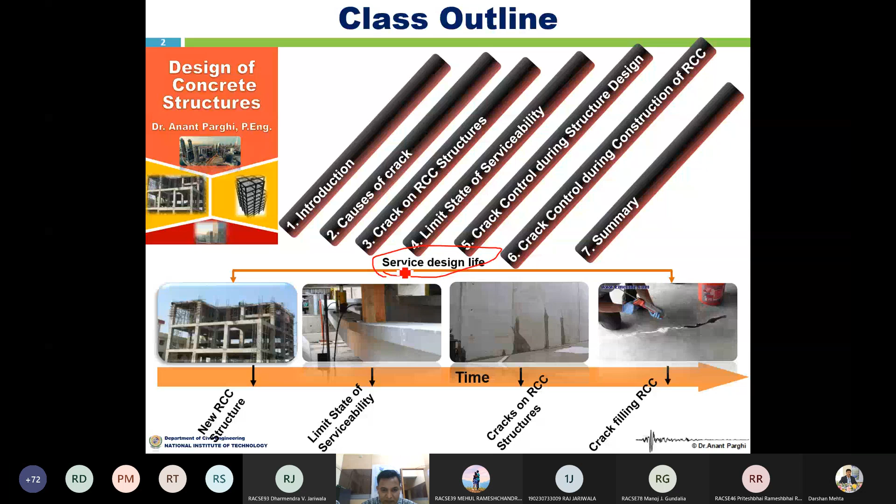For example, we can use epoxy or some rich mortar to fix the structure. Eventually we need to see what will be the service life of the structure. The main thing is the service life of the structure, how we can predict it, and that is related to the serviceability criteria.

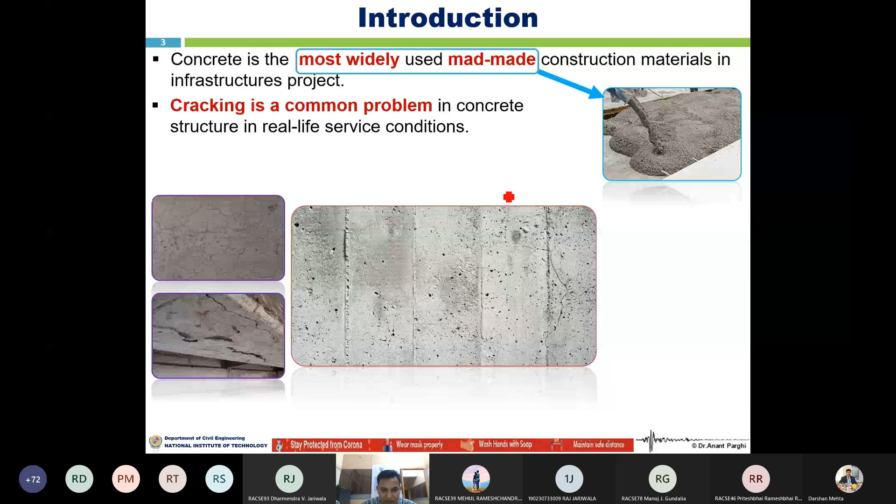Let's discuss what is cracking. Concrete is the most widely used man-made construction material in infrastructure projects. Cracking is a common problem in concrete structures in real life service conditions. In this photograph you can see how the cracks develop. Crack-free concrete structures are very rare to find in real world practice.

Let's say in construction practice, these are fresh concrete, these are hardened concrete. Here some structures show cracks - you can see all the cracks developing, randomly organized. Here also, in the existing structures and hardened structures, you can see all the cracks.

So how can we say this crack is affecting the safety of that particular structure? It will reduce the service life of that particular structure. The main thing is there are huge economical losses of infrastructure here.

Concrete can undergo early age cracking depending on the mix composition. Another factor is environmental exposure condition - severe environmental exposure, normal exposure, aggressive environmental conditions. Sometimes temperature effects also, like heat of hydration and curing condition. The main thing is curing - if you are not able to apply proper curing in the reinforced concrete structure, the structure is not going to become durable.

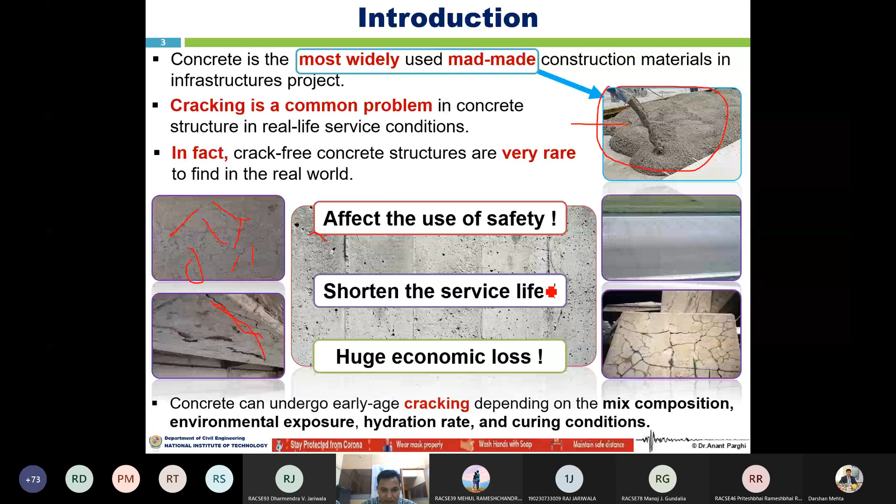Even if you are not maintaining the proper water cement ratio, you will find some shrinkage cracks. So there are different kinds of shrinkage cracks, and if the concrete gets hardened, you will see some plastic cracks.

Let's discuss what kind of cracks occur before the hardening and after the hardening. Once concrete is setting, we can say after hardening and before hardening, during the initial setting time. Before hardening we can have construction movement, plastic crack, frost damage. After hardening we can have volume instability, structural design issues, and physical or chemical causes.

So construction movement includes formwork movement - if your formwork is not proper, there are chances of cracks. Sometimes the subgrade also, for example in construction like rigid pavement - there can be cracks on the subgrade. If there is movement on the ground, there are chances of cracks in the subgrade.

We can say plastic cracks include plastic shrinkage, plastic settlement, and autogenous settlement. Let's discuss premature freezing, scaling, crazing - these are some of the types of cracks. Also volume instability, drying shrinkage - once the concrete is drying, if proper curing is not applied, there is a problem.

Thermal changes, creep also - that is related to long-term duration, like sustained load. Then hardening - after the hardening, like during structural design, once you are calculating the load, intended lifespan, design subgrade, fatigue load, alkali silica reaction, alkali aggregate reaction, steel corrosion, freeze thaw cycling. These are the causes of cracks developing in reinforced concrete structures.

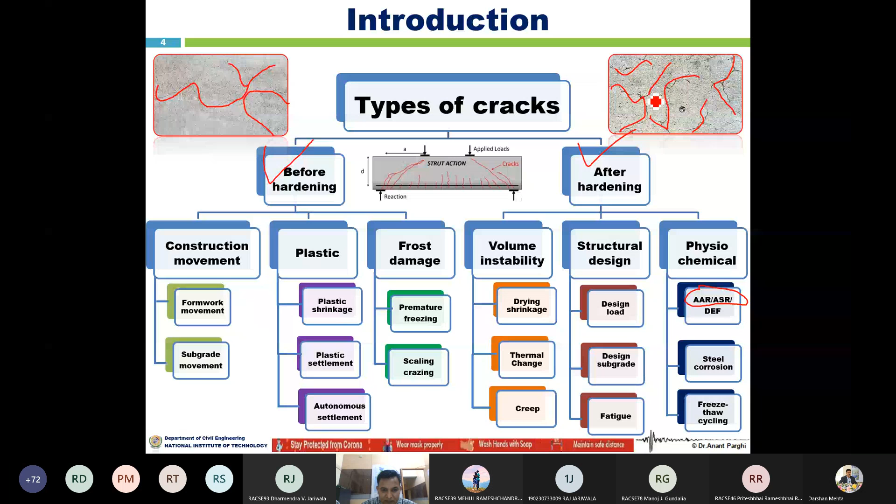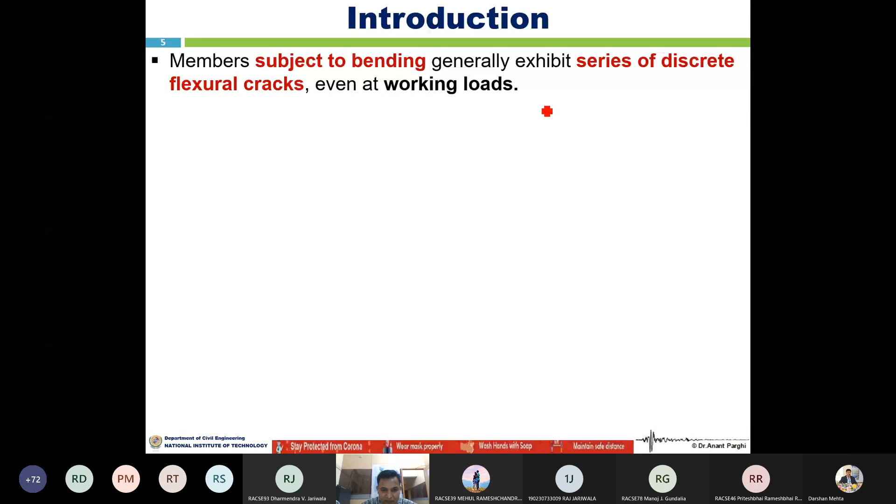So how do cracks happen? Whenever the structural member is subjected to bending, there is generally a series of discrete flexural cracks, even at working load.

Let's consider an example: an RCC beam, where depth of the beam is D and breadth of the beam is B. Let's say we apply a sustained loading. This is the tensile reinforcement here, and you are applying the loading - axial, like the gravity load. Because of that particular working load, there is a chance of cracking.

Here you can see the tension as well as compression zone. The compression fiber gets compressed, and the tensile fiber develops tensile forces, and because of that force, some cracks develop. So when tensile stresses are greater than the tensile capacity of that particular concrete structure, then tensile stresses build up, and crack is going to develop.

These cracks are unobtrusive and harmless unless the width becomes excessive. Some cracks are permissible according to the code of practice, but if it goes beyond that permissible limit, it becomes a harmful crack. So initial cracks develop because of the sustained loading.

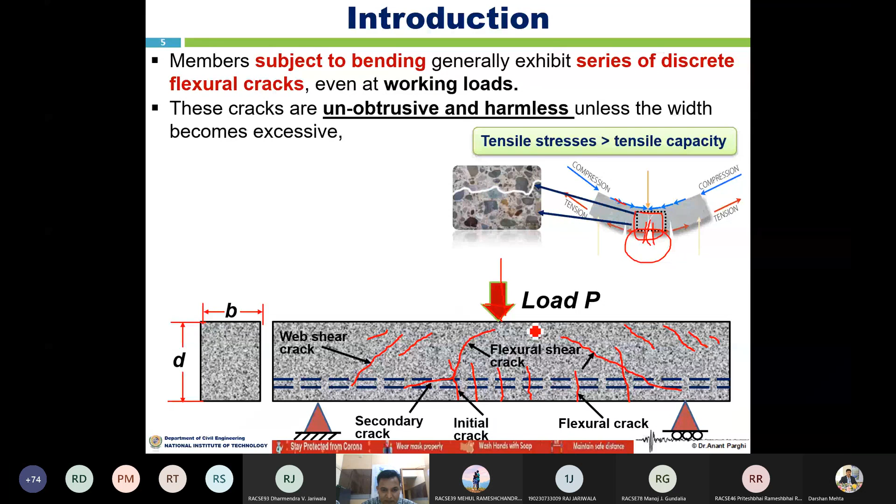Here we can say secondary crack develops in the concrete structure, something like here - you can see how the crack is, like a web shear crack. Because of this sustained loading, flexural cracks develop, shear cracks develop, affecting appearance and durability.

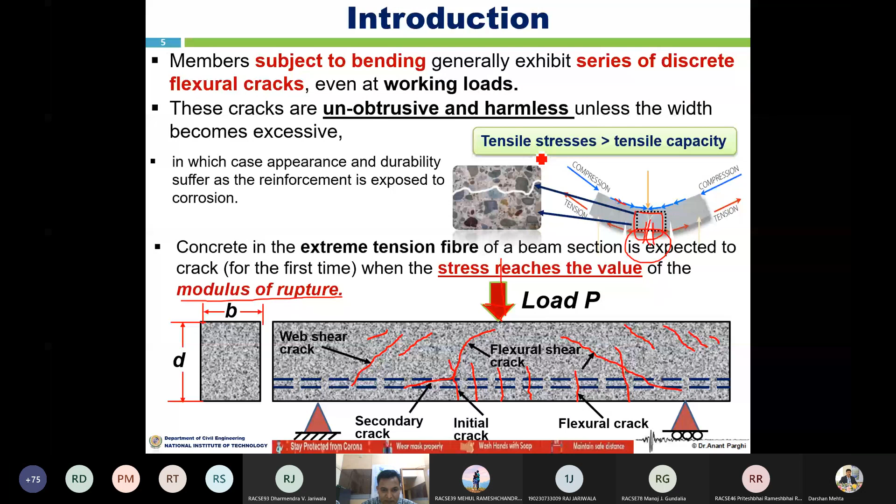The concrete in the extreme tension fiber of a beam section is expected to crack for the first time when the stress reaches the value related to the modulus of rupture. So once tensile stress is greater than the tensile capacity of the structure, then the crack develops - it will be a shear crack as well as a flexural crack.

Let's consider this RCC frame structure, where cracks are going to develop - let's expand this particular beam. Here you can see there is a flexural crack, and a web shear crack also. Cracking of the concrete section cannot be prevented, but the size and location of the cracks can be controlled.

So how can we control it? By using proper reinforcement, placement of control joints, and better curing practices - this way we control the crack. So once this crack develops, whether it is a flexural crack or a shear crack, we can control the cracks, their size and location, by providing proper reinforcement detailing.

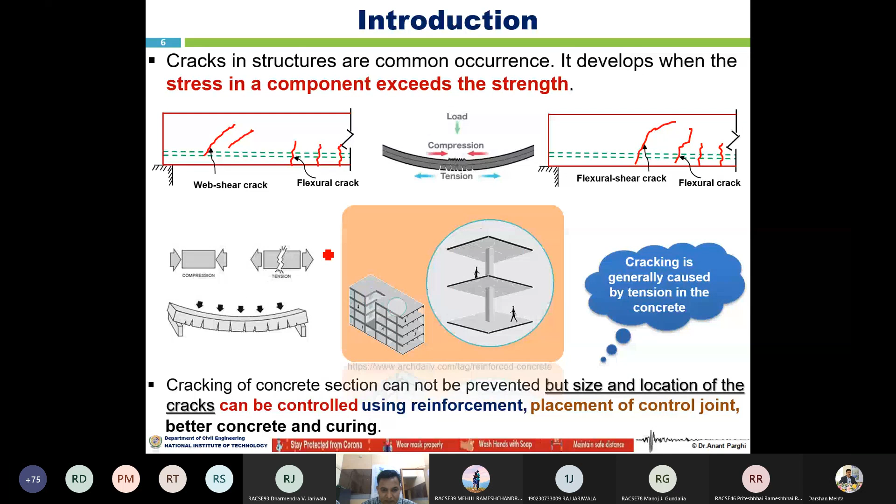Once we are providing the joints, also it should be proper joints and better curing practice, like construction practices as well as curing practices.

So causes of the cracks. Why do cracks develop? Load induced cracks will be about 5 to 10%, which we can consider structural cracks. Deformation induced cracks, which we consider non-structural cracks, make up 80% or more of cracks.

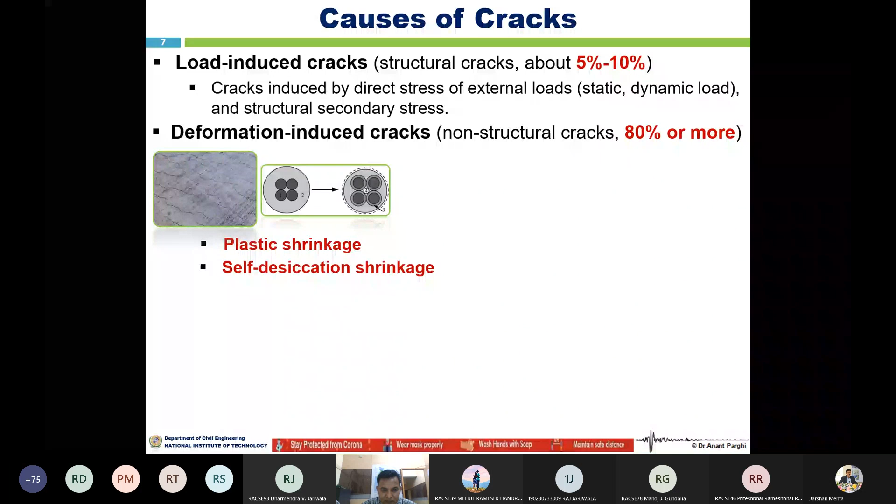As we defined earlier, that was before hardening. So plastic shrinkage, self desiccation shrinkage, drying shrinkage - all these cracks happen because of humidity change and temperature changes.

Once the temperature of the atmosphere changes, concrete performs differently and cracks develop. For example, once we are casting concrete, let's say early at 4 o'clock in the morning, the crack pattern will be different. If you are casting concrete at 8 o'clock in the morning, the crack pattern will be different.

Same concrete, everything kept identical. If you are casting at 2 o'clock in the afternoon, the crack pattern will be different. So how can we control this through construction practices?

These cracks can sometimes be due to alkali aggregate reaction, AAR. Sometimes freezing and thawing, uneven expansion, bad soundness, and different issues also. So how can we control all this cracking?

Load induced cracks as well as deformation are causes of cracks due to poor construction practice. For example, if you are adding more water in the concrete, it will increase workability. So what will be the effect in practice?

This will reduce the concrete strength and increase settlement, and increase drying shrinkage as well as plastic settlement cracks will develop. If you increase the cement content to offset a decrease in strength from adding water...

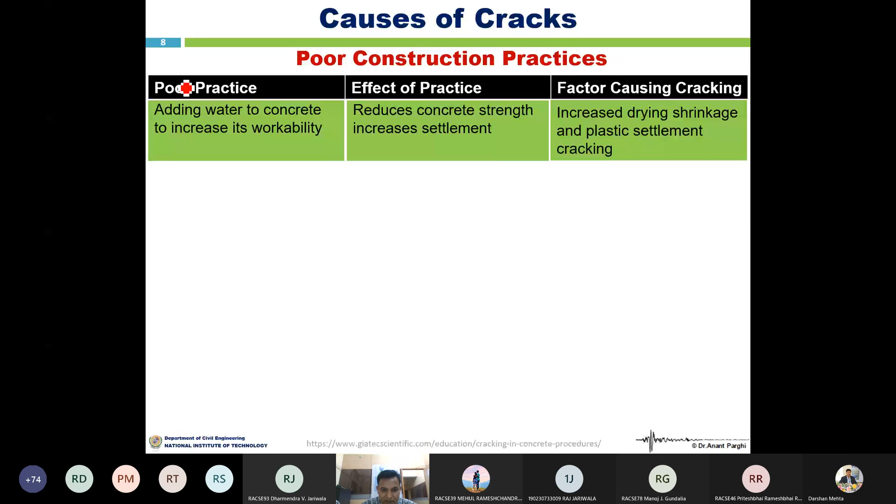What will be the effect? This will affect the temperature differential between interior and exterior sections, and will increase the volume of the cement paste. Eventually this will increase drying shrinkage as well as thermal cracking.

If you are not applying proper curing practices, like inadequate curing, there is a lack of concrete hydration at that time, which decreases the compressive strength of the concrete. So this factor causes increased shrinkage at a time when the concrete has low strength. Another thing is lack of support formwork.

If you are not applying proper formwork, with inadequate and incorrect placement of construction joints, this will increase settlement, insufficient support for the setting concrete, joints open at points of high stress also - and eventually what is the causing factor?

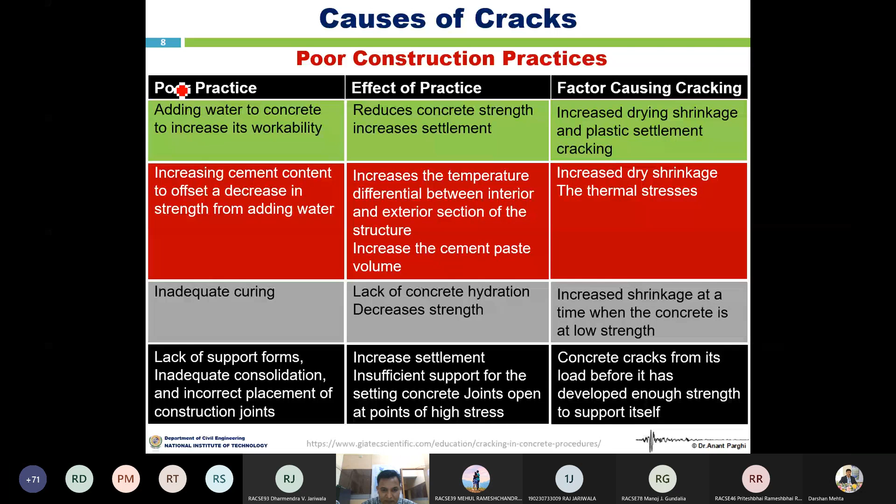Concrete cracks from its load before it has developed enough strength to support itself in that particular concrete structure. That is the main reason for poor construction practice.

If you are not applying proper construction practice and proper curing conditions, cracks will develop in the reinforced concrete. Let's consider one example: a square beam.

So how does the cracking process develop under the action of sustained loading? Let's apply loading to this particular structure. Let's say it's a simply supported beam here, and here we are applying the forces.

So here we can draw the load-deformation diagram: load on the y-axis, deformation on the x-axis. Here we can say, because of the force, this kind of tension stiffening causes cracks to develop.

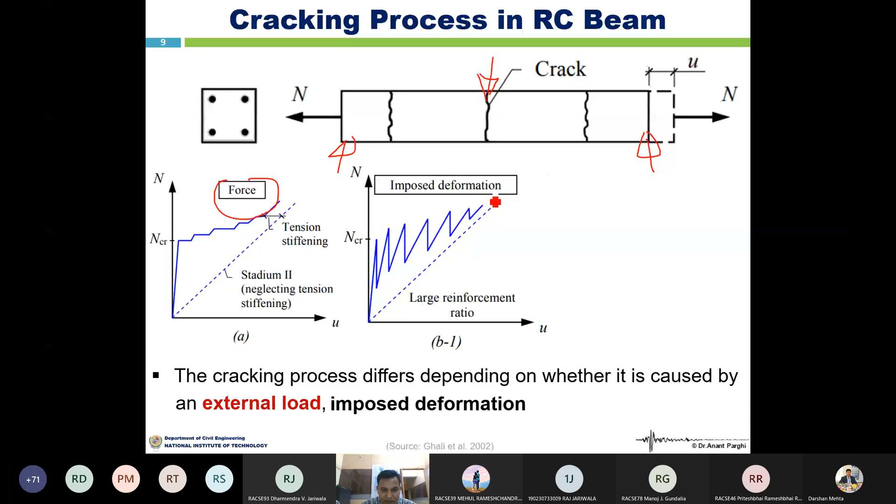If you are applying imposed deformation, once you apply the imposed load, the crack pattern will be different. If you are restraining that shrinkage, the pattern will be different. So the cracking process differs depending on whether it is caused by external load, imposed deformation, or restrained shrinkage. For example, if you apply a fixed boundary condition for this structure, restraining the support condition, the crack pattern will be different.

If you are applying imposed loading and imposed deformation, the crack pattern will be different.

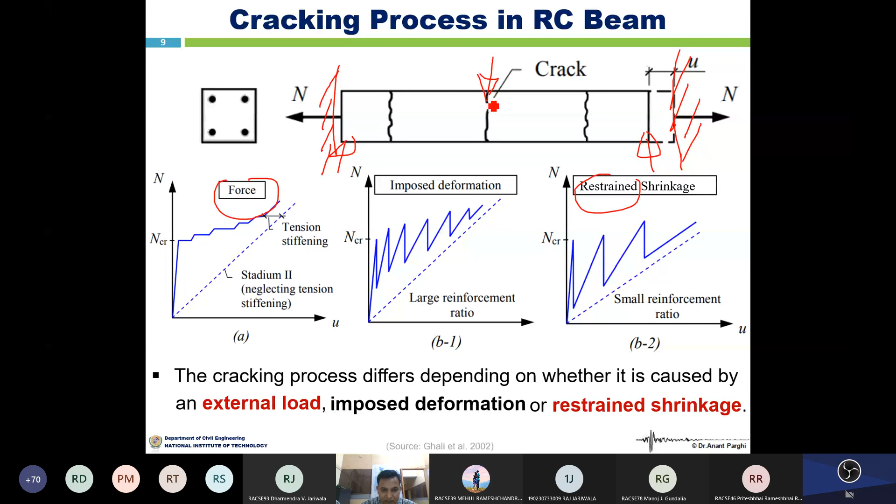All reinforced concrete beam elements, for example beams and columns, will get cracked. This generally starts at loads well below the service level, and possibly even prior to loading, due to restrained shrinkage also. Flexural cracking due to load is not only inevitable but actually necessary for the reinforcement to be used effectively.

So regarding this vertical crack, why does it occur? It runs parallel to the longitudinal reinforcement, so because of corrosion of the longitudinal reinforcement, this vertical crack develops.

The diagonal crack is the shear crack. Why does this kind of crack occur? Because of inadequate lateral reinforcement in the reinforced concrete structure.

Another crack is the horizontal crack. If you are not applying proper curing condition, proper support condition, or proper material quality, this kind of crack develops. Sometimes a crack develops like a splitting crack also.

Prior to the formation of the flexure crack, the steel stress is no more than n times the stress in the adjacent concrete structure. So what is n? It is the modular ratio, the ratio of the modulus of elasticity of steel to the modulus of elasticity of concrete. That's how we find the modular ratio.

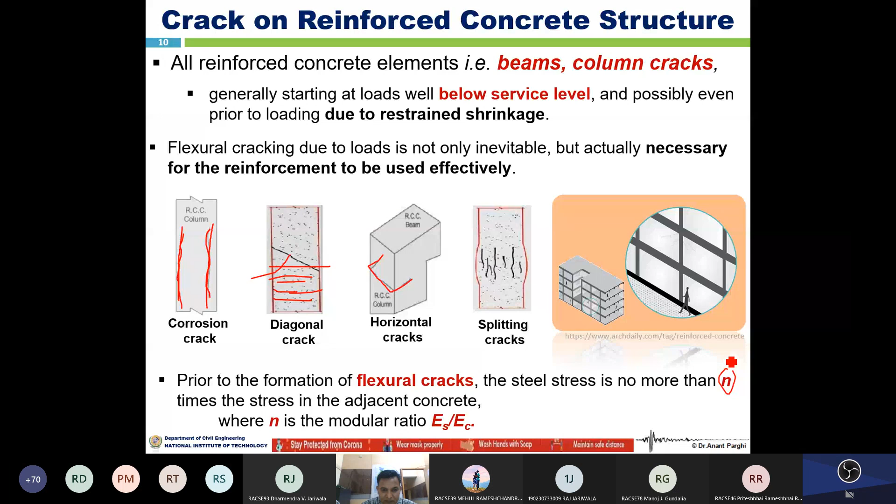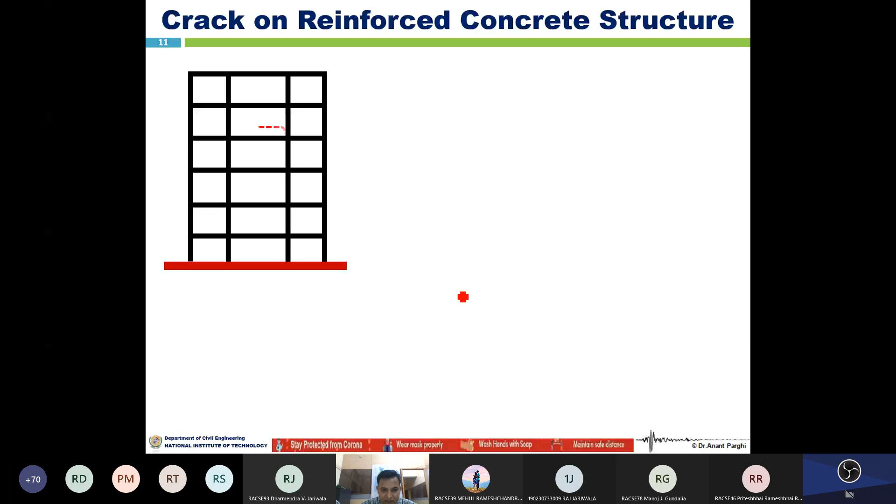Let's consider an RCC building. Once you apply loading, cracks develop. Because of the loading, both shear cracks and flexural cracks develop. These kinds of cracks we call inclined cracking.

These are the inclined cracks, which are shear cracks, at roughly 45 degrees with respect to the horizontal. This kind of crack we call flexure shear crack.

These kinds of cracks we define as flexural cracks, developing because of the gravity load. If the crack develops in this pattern, at 45 degrees, or diagonally, that kind of crack is the shear crack.

Sometimes changing force conditions in the concrete structure lead to local or even overall failure of the structure. Once you test the structure, for this particular beam under the action of gravity load, the crack pattern will be different.

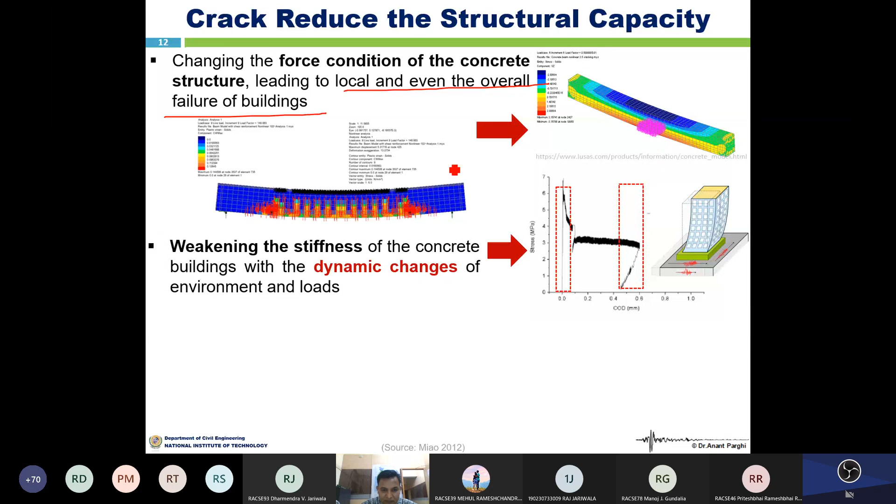This weakens the stiffness of the concrete building with dynamic changes in environmental conditions also. Eventually this reduces the seismic capacity of that structural member, which will affect the stability and safety of that reinforced concrete structure.

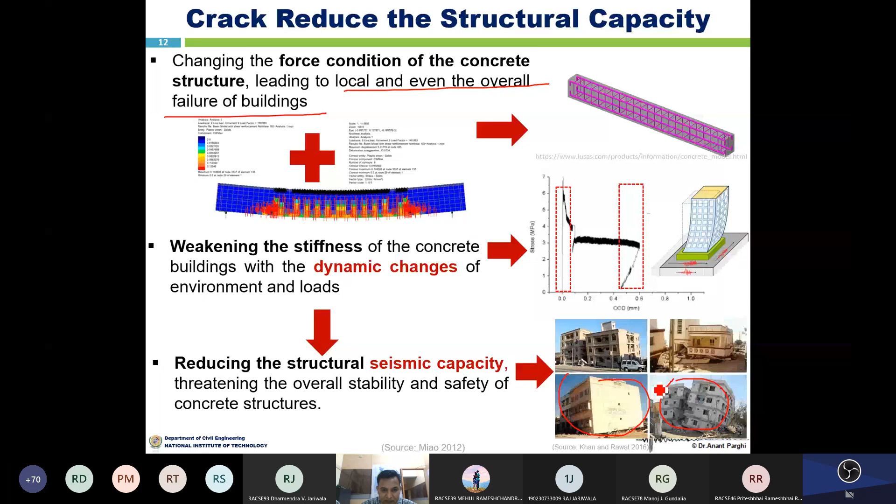This particular structure has been damaged due to the earthquake. This photograph is from the Bhuj earthquake, which occurred on January 26, 2001. The cracks deteriorate the structural durability also.

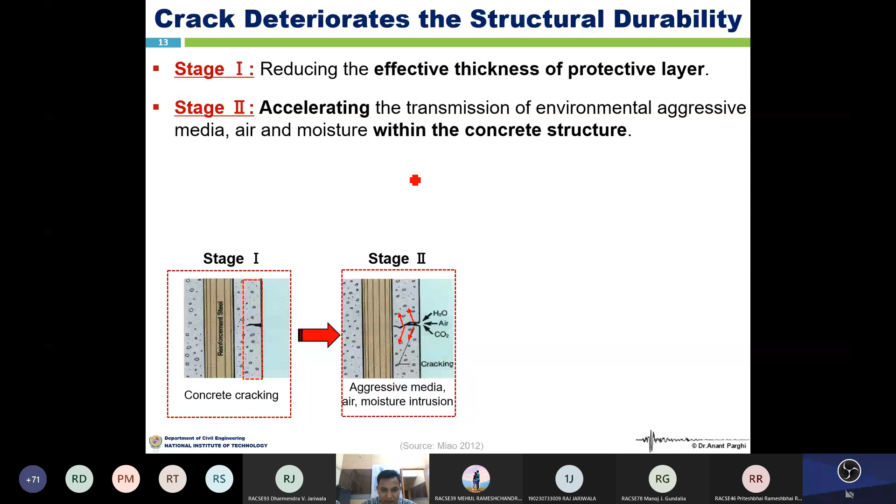Next, stage number three: because of the cracks developed by corrosion, H2O, air and CO2 penetrate inside the concrete structure and reach the reinforcement, causing the reinforcement to start corroding. This shortens the activation and corrosion time of the reinforcement, which reduces the service life of that particular structure.

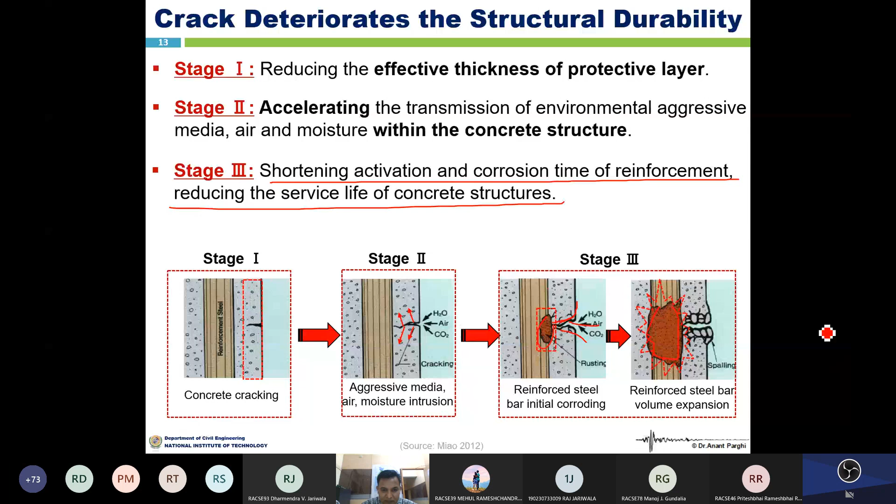Let's discuss, before designing a reinforced concrete structure, some assumptions we take. Why do we need assumptions? Because whatever laboratory practice or design practice we do, it's not necessary that the actual structure behaves the same way in the field condition - it happens differently. Therefore we need to consider the factor of safety and take some assumptions.

For example, plane section remains plane: the plane of strain in that section remains plane after deformation. There is a perfect bond between steel and concrete - we assume no slippage occurs for this structure. There are no slippages; that is our assumption.

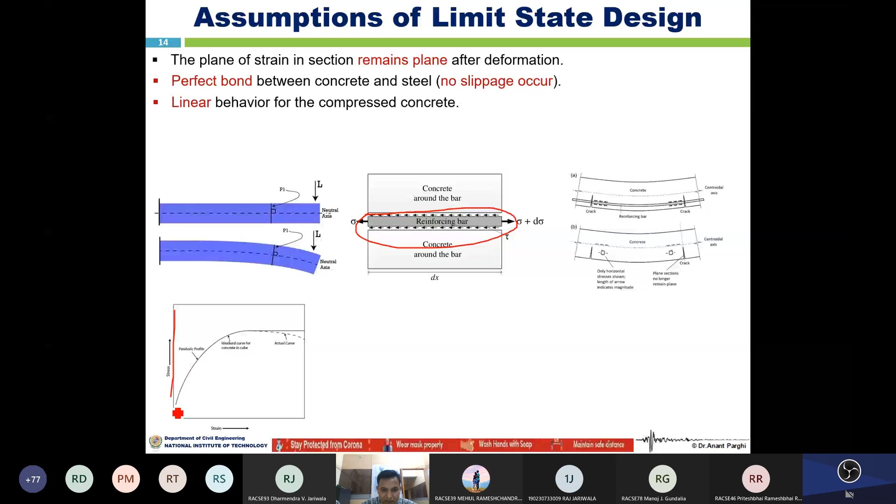Another assumption concerns the behavior of compressed concrete: the stress-strain behavior is linear. In the design of the concrete structure, we ignore the tensile strength of concrete, which is about 10% of the maximum compressive strength, and should not occur beyond 0.35%. Why do we consider 0.35%?

For example, let's say you can test the concrete cylinder under the action of that particular loading. Once you draw the stress strain diagram, the maximum strain will be about 0.0035, regardless of the grade of the concrete, because whether it's 20, 50, or M80 concrete, the ultimate strain will be about 0.0035.

Here we are considering linear behavior of the steel under tension as well as compression, like the stress strain diagram of the mild steel reinforcement. So it will get yielding, like upper yielding point, lower yielding point, ultimate strength, as well as the fracture.

So what we are discussing is that we are ignoring the tensile strength of the concrete. This is the compressive strain, so compressive strength will be higher, but the tensile strength capacity will be very low, about 5 to 10% of the compressive strength of the concrete. So therefore, we are neglecting the tensile strength in our structural design.

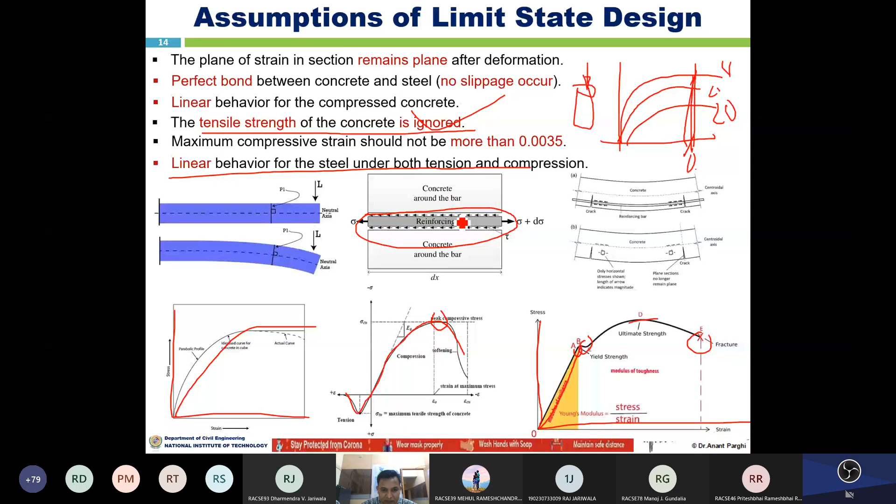But we must consider the tensile strength of the concrete because it depends on your condition. So what is the limit state of serviceability? It deals with the functional use of the structure under normal loading, concerning the functioning of the structure and the comfort of the people. That is related to strain, vibration, cracking, and major serviceability issues like excessive width.

This means crack control for excessive crack width, and excessive deformation control. How can we control the stress limitation, which is related to the materials, steel as well as concrete? Another aspect is undesirable vibration, thermal and sound insulation. These are some of the limit state of serviceability criteria.

So let's say this particular structure, we are applying gravity load, and the structure is simply supported. Once we draw the load versus deformation diagram, we can see that because of the load, some initial crack is going to develop. Later on, we reach the limit state of serviceability criteria for this particular region.

So yielding of the reinforced concrete member happens here, where the steel reinforcement is going to yield. Later on it will go to the ultimate limit state, and eventually the structure is going to fail. So whatever we design, our structure should satisfy the serviceability criteria of the limit state.

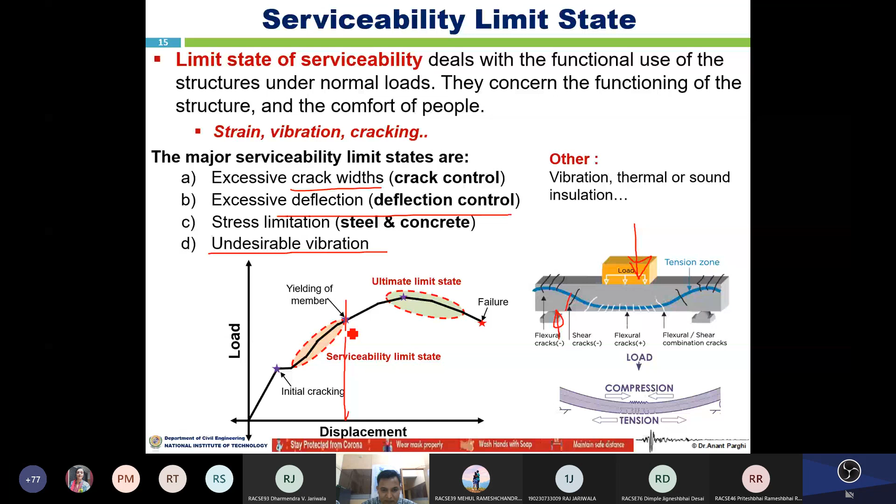So the limit state serviceability criteria mainly involves crack control and deflection of that particular structure. This limit state of serviceability criteria needs to be kept in mind during our structural design.

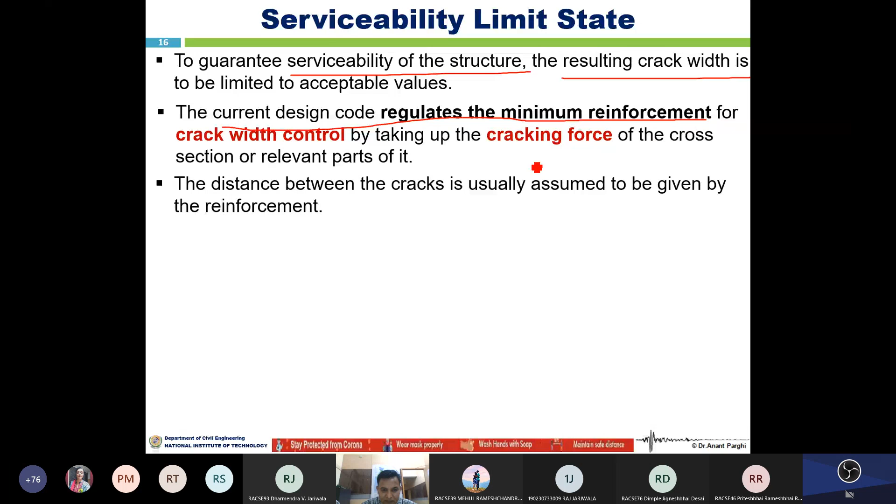In order to guarantee the serviceability of the structure, the resulting crack width should be limited to acceptable values. The code of practice has given some acceptable values, so the crack width should be within a permissible limit. The current design code regulates the minimum reinforcement for crack width control by taking the cracking force of the section relevant to that particular part.

And the distance between cracks is usually assumed to be given by the reinforcement also. So in this particular structure, bending and flexure create high tensile forces which can cause the concrete floor slab to crack.

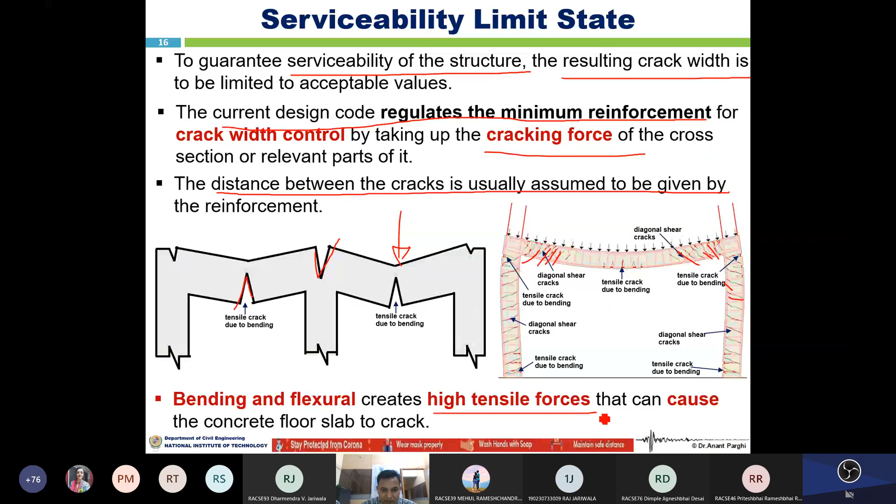So whatever forces we apply, cracking due to tension from bending causes these kinds of cracks to develop in the structure, like shear crack, which will be diagonal shear crack, and flexural crack also develops. Because of excessive bending, stress develops, and due to high tensile forces, the bending stress increases, causing flexural as well as shear cracks.

So how can we control the crack? The crack should not be unsightly or wide enough to lead to a durability problem. The main thing is a durable structure, which depends on structural parameters, for example steel-concrete bond and minimum cover requirement.

So what is deflection control? It's about setting an appropriate limiting value of deflection. For this particular structure, you can have shear tension failure or shear compression failure also. Once you are designing the structure, for example whether it is an under-reinforced section, balanced section, or over-reinforced section, this particular crack develops because of the loss of bond due to that crack.

Because of the crack, the bond is lost between that crack, the steel reinforcement, and the concrete structure inside that particular structural element. But even in structural design, we have assumed that there is a proper bond between steel as well as concrete, right? So now our assumption is going to fail.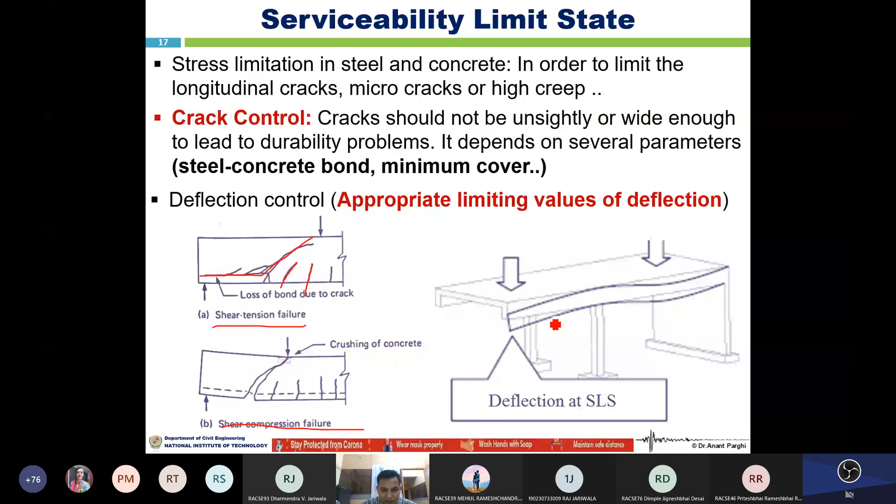Let's consider the cracked section as well as the uncracked section. At small load, when tensile stresses are less than the modulus of rupture - bending tensile stress at which the concrete begins to crack - at that bending tensile stress, concrete will start cracking. So that will be the initial cracking.

The entire cross section of the beam resists the bending with compression on one side and tension on the other side. Let's consider one of the RCC members like a beam. Width of the beam is b, depth is H, and these are the depths from this particular reinforcement to the top fibers.

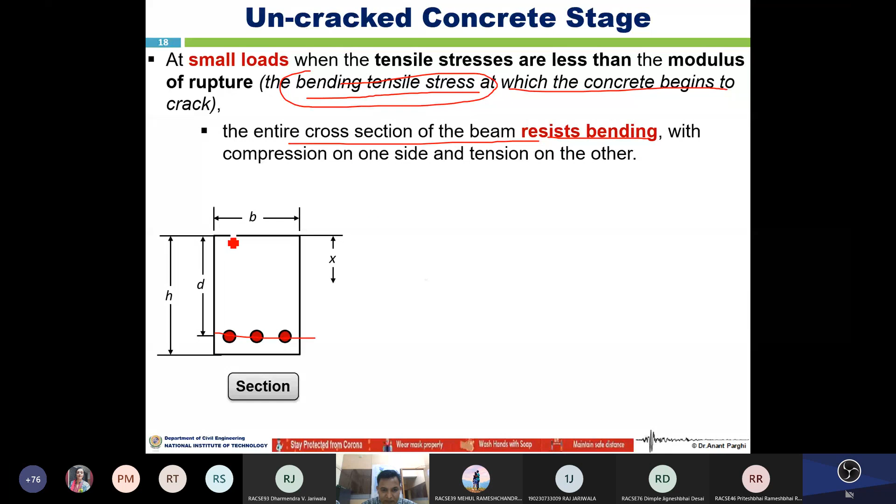So let's say here this will be the neutral axis. So you can say here these are the compression fibers, the top fiber, these are the bottom fiber. So that will be the tension. Here we can define the neutral axis.

So how do you define the neutral axis? There should not be any tensile forces, there should not be any compressive forces. So in this particular region, there is no tensile force, there is no compressive force. Therefore, we can define which will be the neutral axis.

So here you can say compressive strain, and here because of the reinforcement, the strain is going to happen for the reinforcement. This strain is related to the stresses. So in this particular region, if you do the stress block diagram, the compressive stress is going to happen from two-thirds of that particular distance x, and here the tensile force is going to develop for this particular structure.

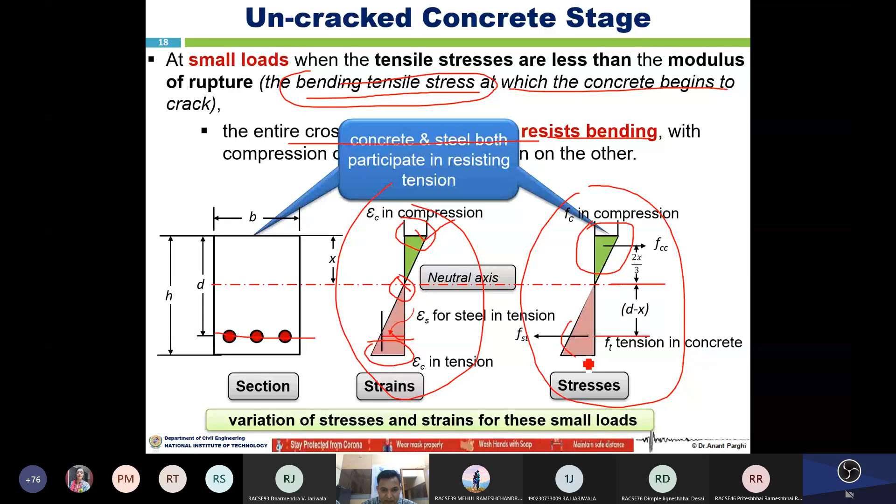So we can say concrete and steel both participate in resisting the forces, which will be the tensile forces. So here the concrete is also giving its contribution, and the steel reinforcement is also giving its contribution in order to resist that particular tension.

So it was the uncracked section, but let's discuss the cracked concrete section. As the load is increased, after the modulus of rupture of concrete is exceeded, the cracks begin to develop at the bottom of this particular reinforcement. So that is the tension.

As the load is further increased, this crack quickly spreads up to the vicinity of the neutral axis, and then the neutral axis begins to move upward. The cracks occur at those places along the beam where the actual moment is greater than the cracking moment.

So for this particular reinforced concrete structure, once you apply the uniformly distributed load, you can see the bending moment diagram. For this particular central span, maximum bending moment is going to develop, but once you go closer to the support, the moment is going to get zero.

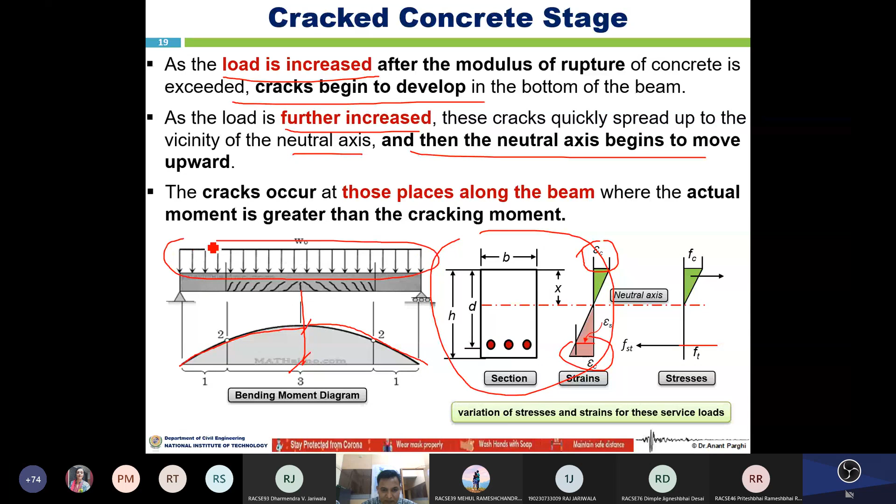So here you can say the maximum tensile compressive force, compressive strain, and the maximum tensile strain in the bottom fiber also - these are from the stresses. So variation of the stress and strain distribution from this particular service load, that is the gravity load, the uniformly distributed loading.

So another thing, let's discuss cracks due to imposed deformation. Earlier what we were discussing was cracks due to only forces, right? So now cracks because of the imposed deformation and some restraining factors.

Sometimes wrong calculation of the structural design level restraint may result in wasteful design, or it may be over design or under design, which will lead to unacceptable cracking. So once you're doing structural calculations, if your assumption is wrong, or sometimes if you're doing over reinforced or under reinforced sections, and in the structural design, for example, if you're considering simply supported structure or fixed support condition.

So the bending moment will be different, deformation will be different. Let's consider, for example, a difference in restraint factor from point 0.5 to point 0.6, which will result in a 20% increase in the estimated restraint strain.

If you are considering the restraint factor of 0.1, and now if you are considering 0.5 to 0.6 in between, it will increase the 20% estimate, which could make the difference between no cracking and cracking, or acceptable and unacceptable cracking.

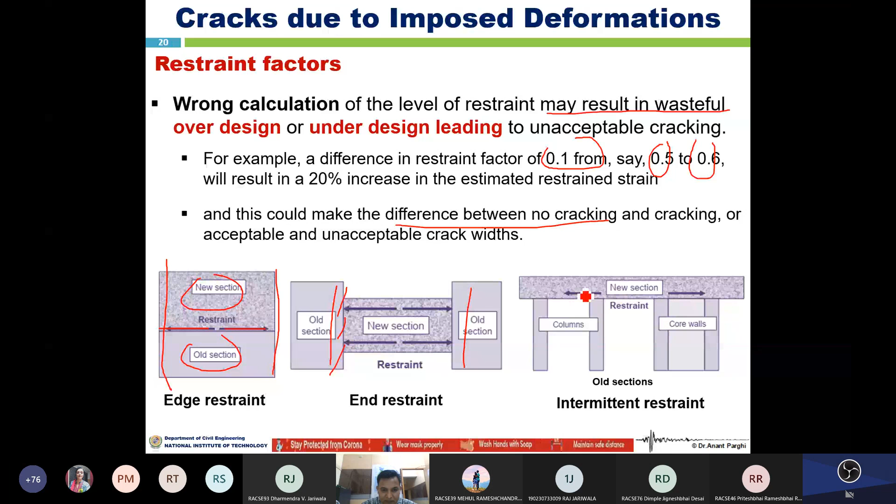The strain will be different. Here, let's say old concrete is here, and both the ends are fixed support, so that crack pattern will be different. Intermittent restraint, for example, let's say these are simply supported beams and these are continuous beams, so the restraint will be different, so the crack pattern will be different too.

Concrete crack controlling: how can we control that particular crack in the beam, which is because of the increase in shear stress near the support? Let's consider a simply supported beam or column example. The concrete stress is developing near to the support, right? So if you see here, the lateral reinforcement spacing should be smaller here.

But here, if you see in this particular region, lateral reinforcement spacing will be higher, because if you see the bending moment diagram of this particular structure, near the support the stress and moment go to zero, but here is the maximum bending moment. And if you see here, that is the shear force diagram, right? So in the shear force diagram, there is no shear developing here.

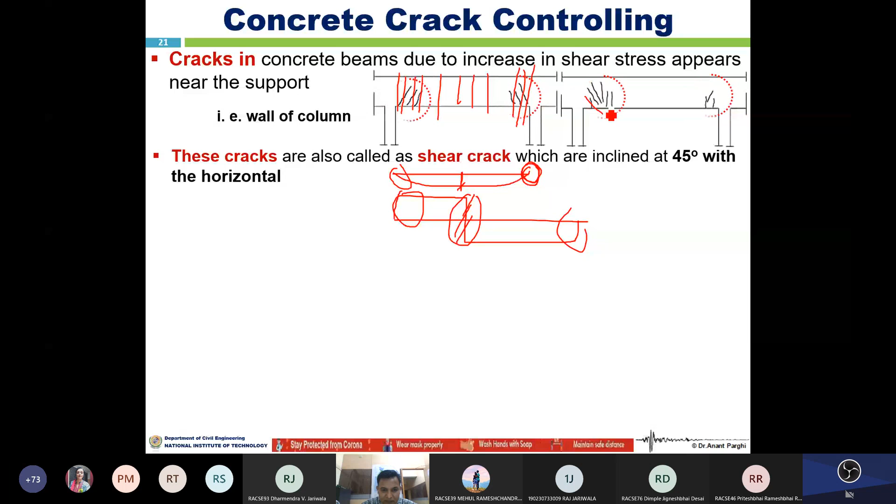For this, very little shear develops, but high shear force develops close to the support, and maximum bending moment develops at the center of the beam. These cracks are also called shear cracks, which are inclined at 45 degrees to the horizontal. These are diagonal cracks, so we can consider them shear cracks. The shear crack occurs at a maximum distance of d/2 from the support, where d is the effective depth of that particular beam.

This crack can be avoided by providing additional shear reinforcement near the support, where the shear stress is maximum.

So for that simply supported beam, if you find out the shear force and bending moment, the shear force is maximum near the support, so diagonal shear cracks develop here. If you provide proper lateral reinforcement near the support, you can control the cracks. This way we can control the cracks, and that's why we provide bent-up reinforcement, in order to resist those particular shear stresses.

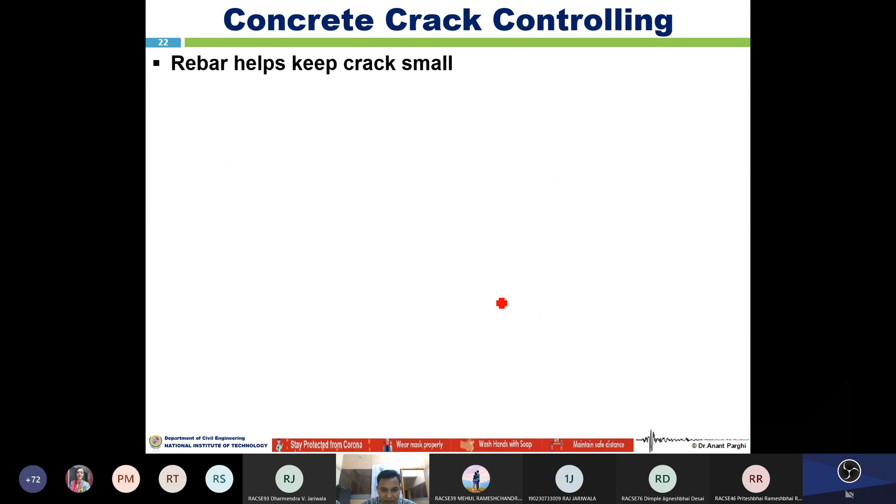Another way to control cracks: rebar helps keep the crack small. For example, if you provide reinforcement with a diameter of 25 millimeters and spacing of 300 millimeters, and instead, keeping the same area of reinforcement, you provide number 13 reinforcement with spacing of 150 millimeters, you are reducing the spacing, which helps control the cracks.

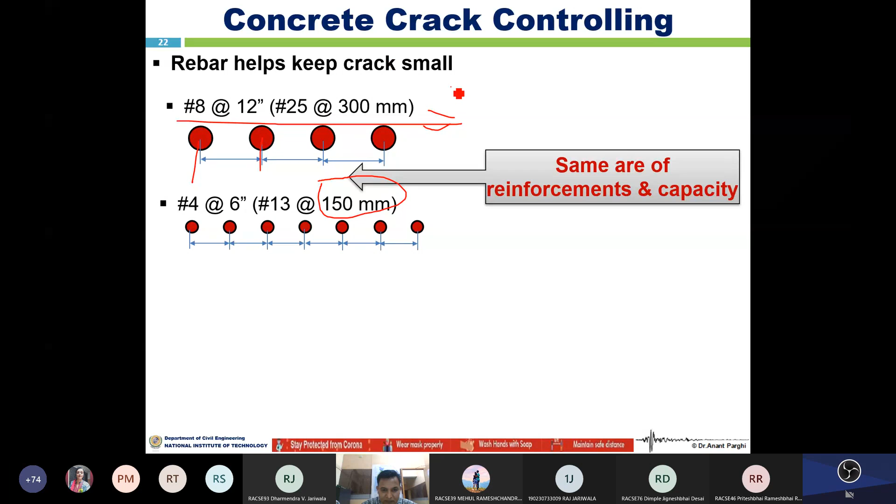So here the area of reinforcement will be the same in both sections and the same capacity, but you have reduced the spacing and the reinforcement diameter. Here larger bar, larger spacing, but smaller bar, smaller spacing, so the rebar will help close the space. The rebar will do a better job of keeping the cracks small.

So how can we reduce or control the crack? Small rebar reduces crack width by about 50% in the concrete structure. This is the main thing, so during structural design we have to take care of this so we can control cracking.

Similarly, how do we find out the cracking? Crack width is the spacing of the cracking multiplied by the strain. How can we find out the strain? Strain is the ratio of the change in length to the original length.

This way we can reduce the crack spacing and use a smaller reinforcement diameter, as discussed earlier. We can also reduce the spacing, reducing the strain and using the partial load factor. So in design of reinforced concrete structures, for the limit state of serviceability, we utilize the partial load factor, and this way we can control the cracks in the structure.

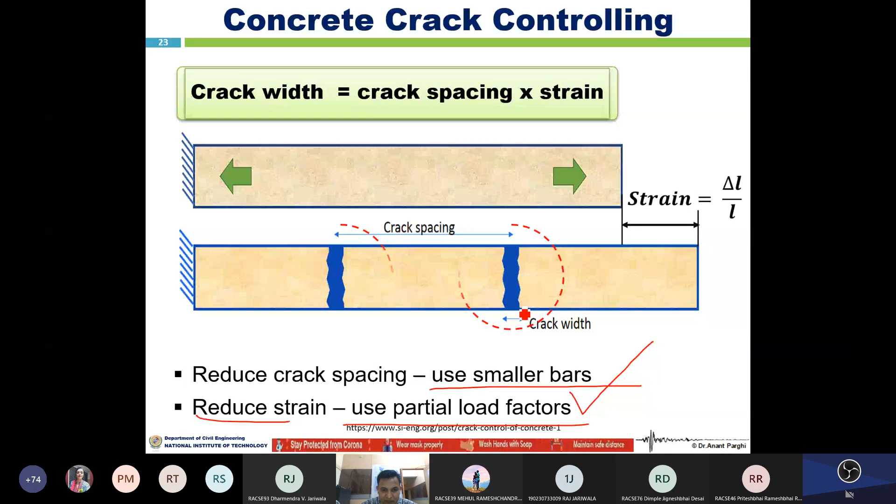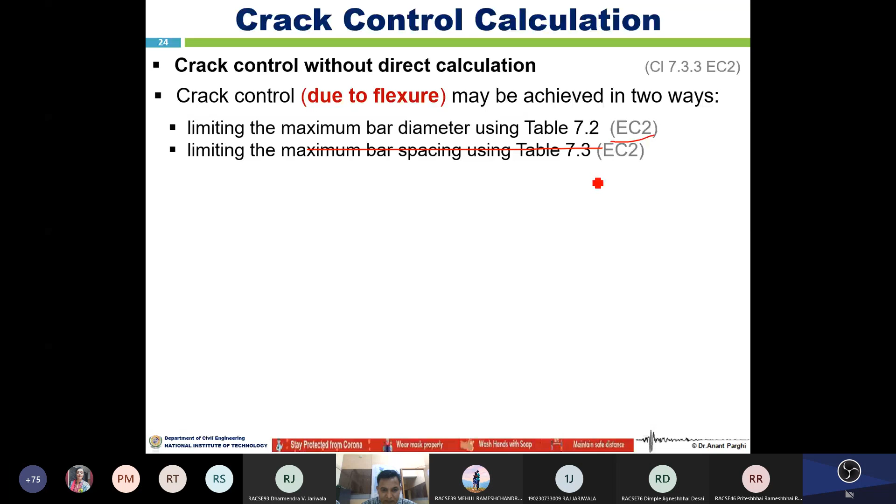So all these cracks we can control by how we provide reinforcement during design. Crack control without direct calculation: how can we control the crack according to the Euro code? Crack control due to flexure may be achieved in two ways: limiting the maximum bar diameter, as discussed, and limiting the maximum bar spacing. So you can reduce the diameter of the bar, or you can reduce the spacing.

Where cracking is due to restraint, use only the limited maximum diameter of the bar. So here, without doing any calculation, we can control the crack - that's how we provide the reinforcement.

Now let's look at another approach with a graphical representation. This graph relates to bar diameter and bar spacing. The x-axis is the reinforcement stress, and the y-axis is the maximum diameter of the bar. So if your crack width is 0.2 millimeters, the maximum diameter of the bar should be about 6 to 8, and at that time your tensile stress will be about 320 Newton per millimeter square.

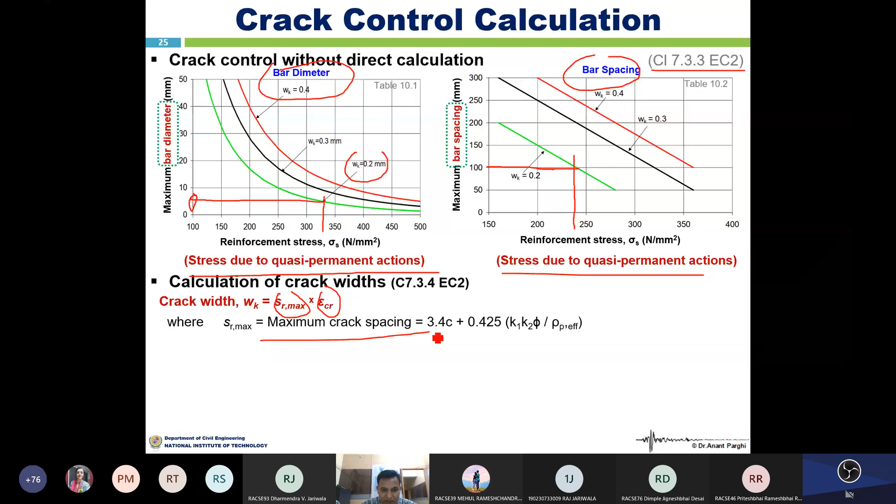Here SR is the maximum spacing of the crack, and this way you can calculate the crack spacing. C is the nominal cover of the reinforced concrete structure. K1 and K2 are factors related to high bond bars, and to tension as well as bending. Rho effective is the area of reinforcement steel divided by the area of the concrete section, relevant for flexural restraint.

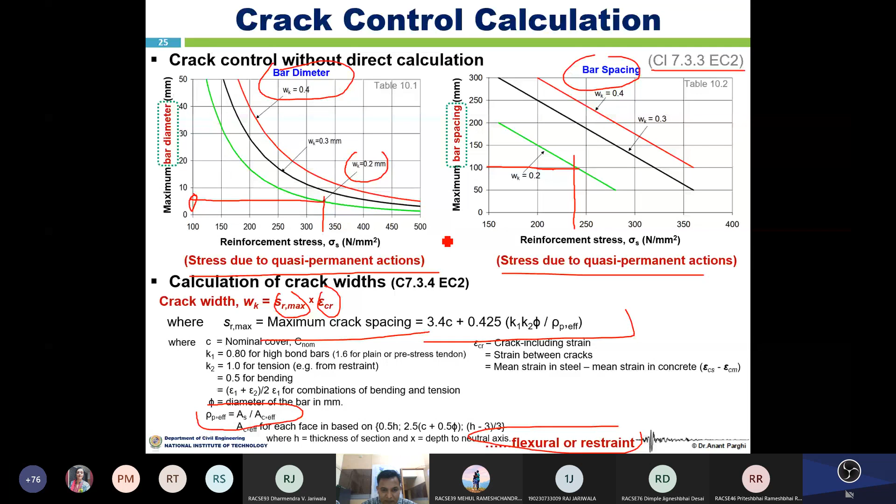This way you can calculate the crack width, or without any calculation, using this equation for flexure you can also calculate this crack. If your factor is 0.6 for short term loading, and for long term loading the KT factor will be 0.4, you can calculate all the crack widths similarly.

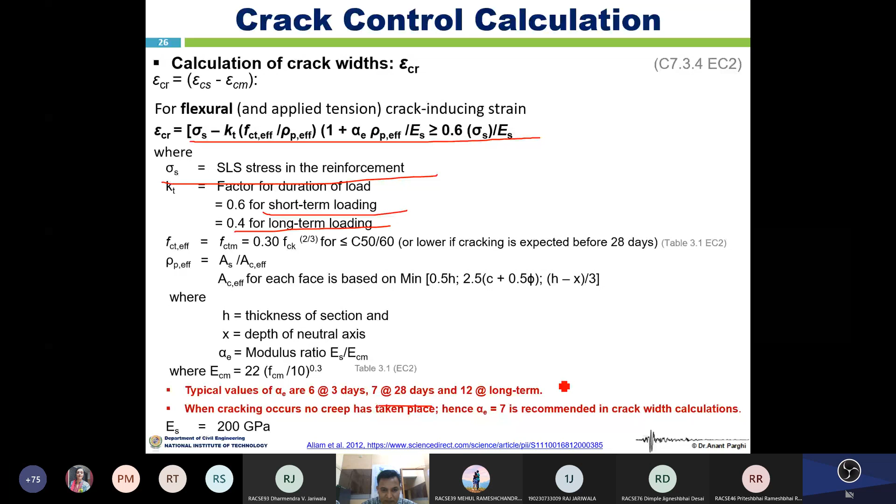The typical values of alpha E given here are 6 at 3 days, 7 at 28 days, and 12 for long term loading. Once you substitute these values into this equation, you can calculate the strain - how much strain develops in the reinforced concrete structure under gravity loading. When cracking occurs, no creep has taken place, so the recommended value of alpha is about 7. We consider the modulus of elasticity of mild steel reinforcement to be 2 multiplied by 10 raised to power 5, equal to 200, and this way we can calculate the strain in the concrete.

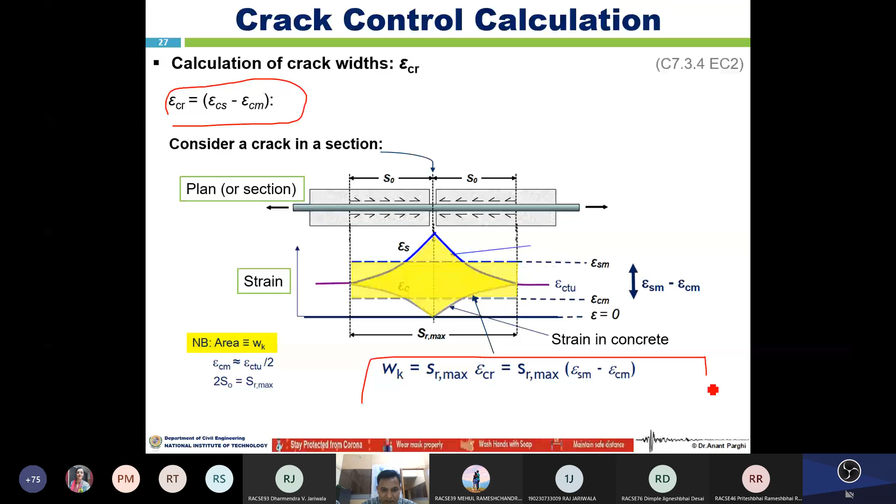So the plane section remains plane, that was our assumption, along with proper bonding. Using this specific equation according to Eurocode, we can calculate the width of that particular crack. That is now related to the code, the Euro code.

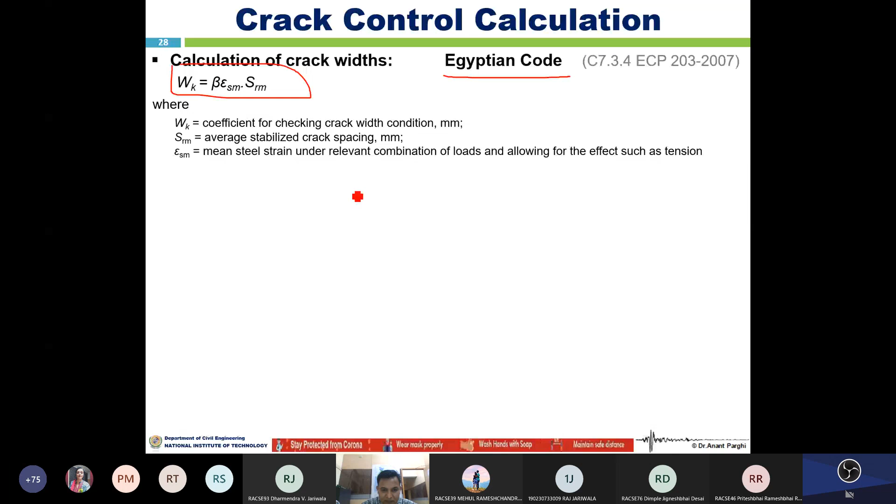So how can we calculate the crack width? Using this specific equation, we can calculate the width of that particular crack. So WK is the coefficient, SRM is the average stabilized crack spacing, epsilon SM is the steel strain of the reinforcement, and beta is the coefficient, which will be 1.7 for the crack induced by loading, and beta value we can consider 1.3 for the crack induced by restraining.

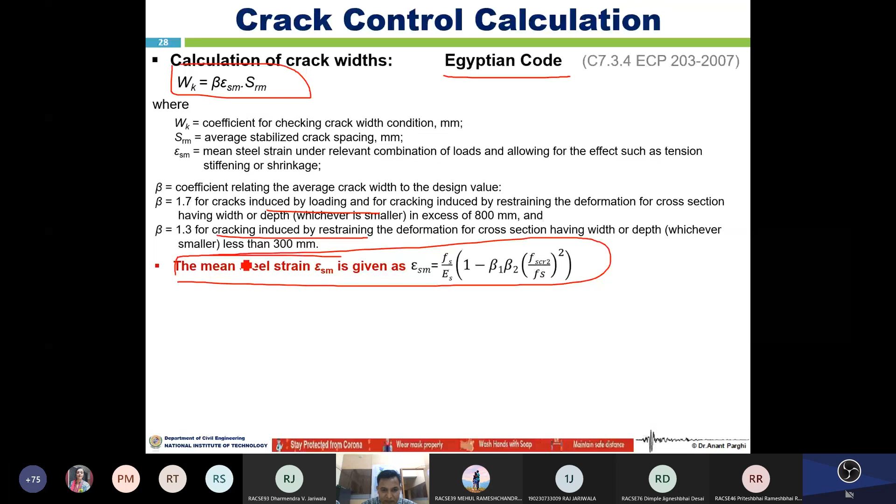Whichever is smaller, so less than 300. So that the value of beta we can calculate. The mean strain in that particular reinforced concrete structure we can calculate using this specific equation. What is Fs? That is the tensile stresses. What is Es? That is the modulus of elasticity.

So all these things, like we can calculate the value beta 1, beta 2, and eventually we can find out what is the strain capacity of this particular concrete structure. This way we can find out the strain using this particular Egyptian code.

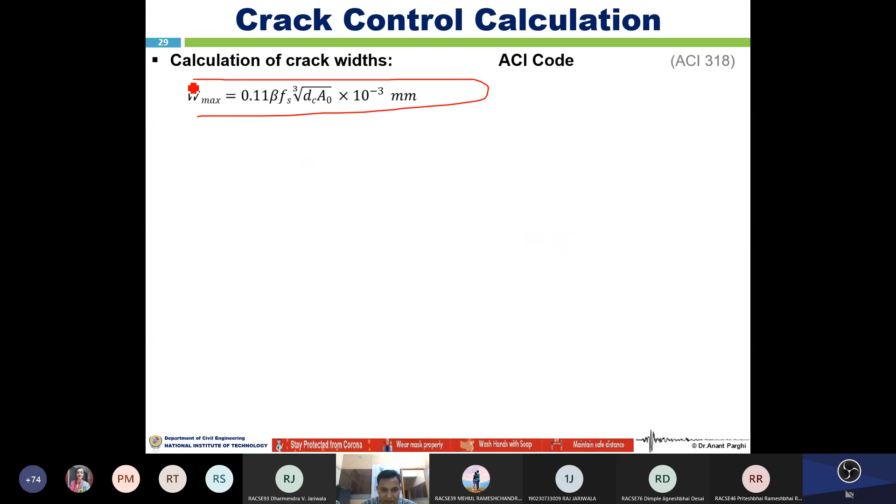So now crack control using the ACI. ACI has given this specific equation to find out the crack width. For this particular equation, beta is equal to the ratio of H minus X to D minus X. Beta is here 1.2. This may be used to compare the crack width obtained in flexure as well as axial tension.

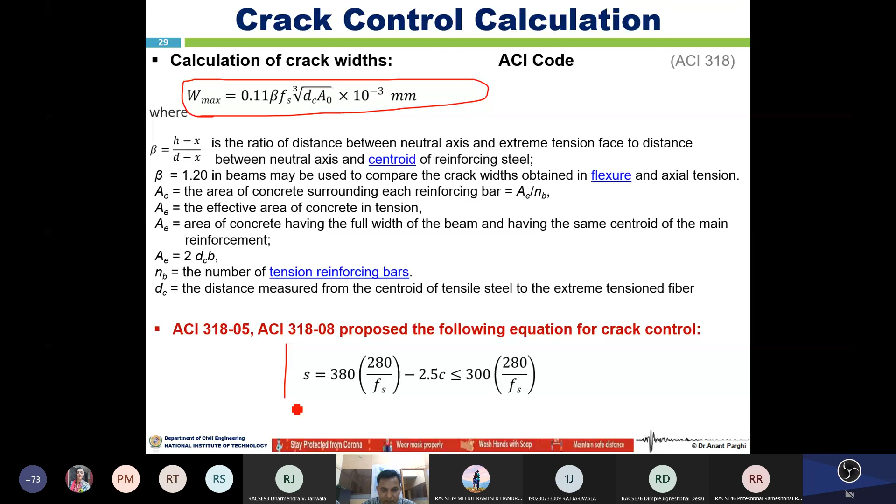So area of the reinforcement A0, AE is the effective area in tension, and now we can calculate all these values using this particular equation, like crack spacing. So AS will be, as proposed by the following equation by ACI 318, and then which was the version of 2005, 2008. Now 2019 is a little bit different.

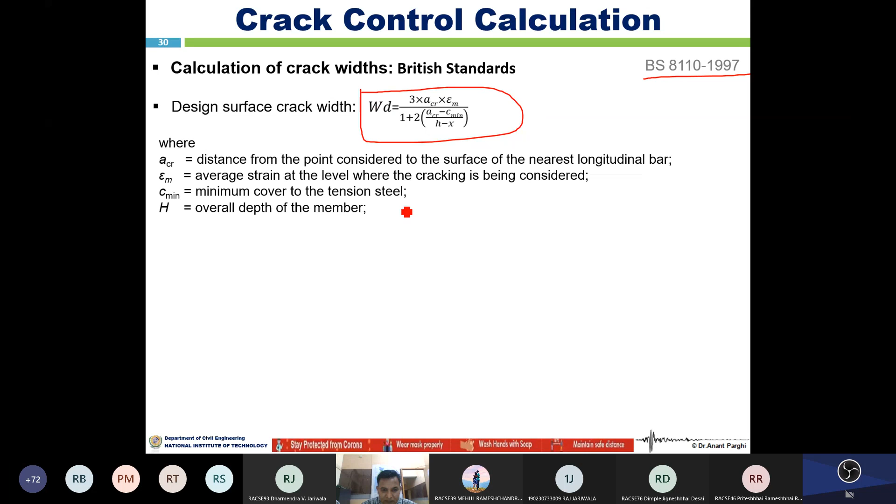Let's see how we can calculate the crack width using the British standard also. The design surface crack width we can calculate using this specific equation. Once you have to calculate this particular crack width, according to the BS, first you can find out the strain capacity. So we can calculate how much strain we are getting and what will be the crack width according to the British standard.

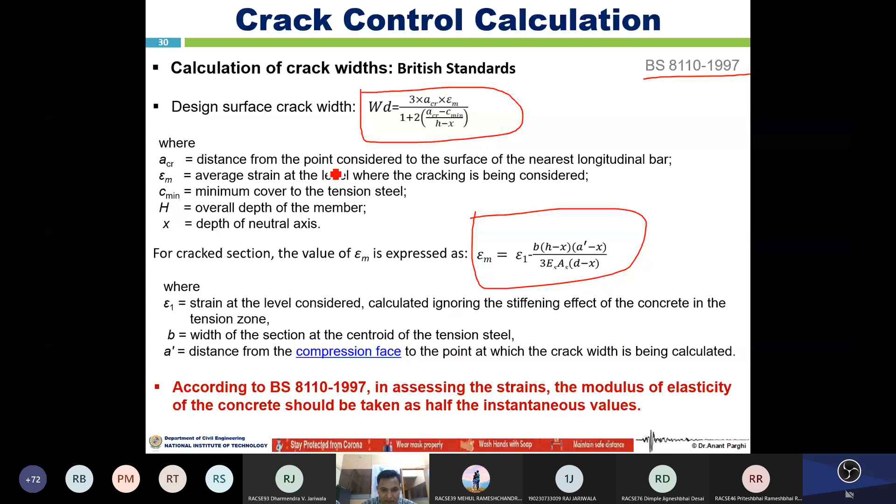So our Indian standard is also related to a combination of the American standard and the British standard. So how can we calculate according to IS 456? IS 456 has given, in Annexure F, some equations for how we can calculate the crack width. Using this particular equation, we can calculate the crack width.

Here ACR is the distance from the point considered to the surface nearest to the longitudinal bar. C minimum is the minimum cover to the longitudinal reinforcement. Epsilon M is the average strain, C minimum is the minimum cover to the tension, and H is the overall depth of the member, with the depth of the neutral axis.

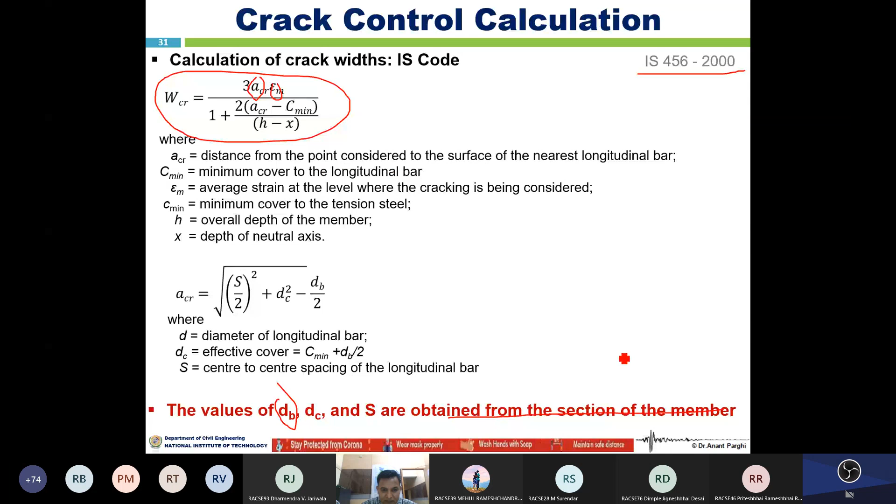So you can calculate the ACR and the epsilon m. Using this particular equation, we can calculate all the values. So this value, diameter of the reinforcement, the cover, and the spacing S, are obtained from the section of that particular member, so that value we can calculate from the sectional analysis.

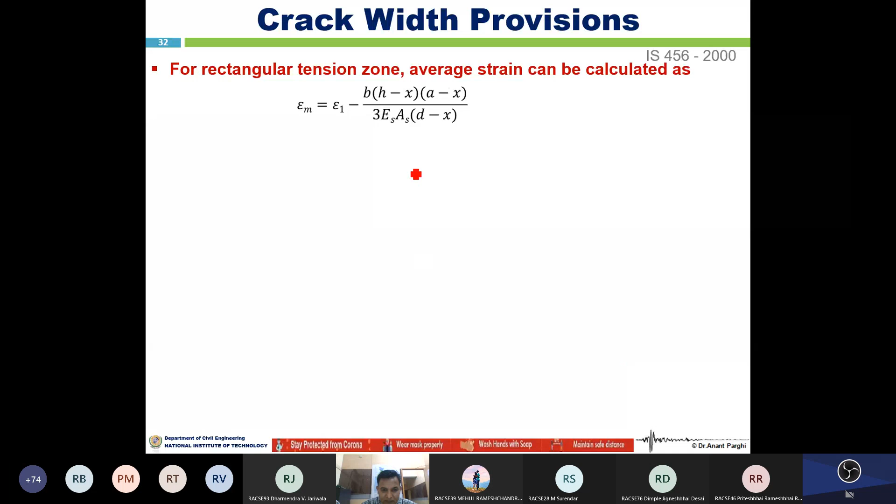So for the crack width, like strain capacity for the rectangular tension zone, we can calculate the average strain using this particular equation. So average strain you can calculate by applying this equation. Now the strain is known, the stresses are known, so now we can calculate the crack width according to IS 456.

So cracking of the concrete should not adversely affect the appearance or durability of the concrete structure, so there should be a permissible limit.

So here we can say the surface width of the crack should not be greater than 0.3 millimeter for normal condition, which means the structure has been protected and not exposed to aggressive environmental conditions. So at that time, the crack width should be 0.3.

Sometimes for moderate and mild environment, the crack width should be less than or equal to 0.2 millimeter, according to IS code. In the case where the environmental exposure condition is very severe, the crack width should be less than or equal to 0.1 millimeter.

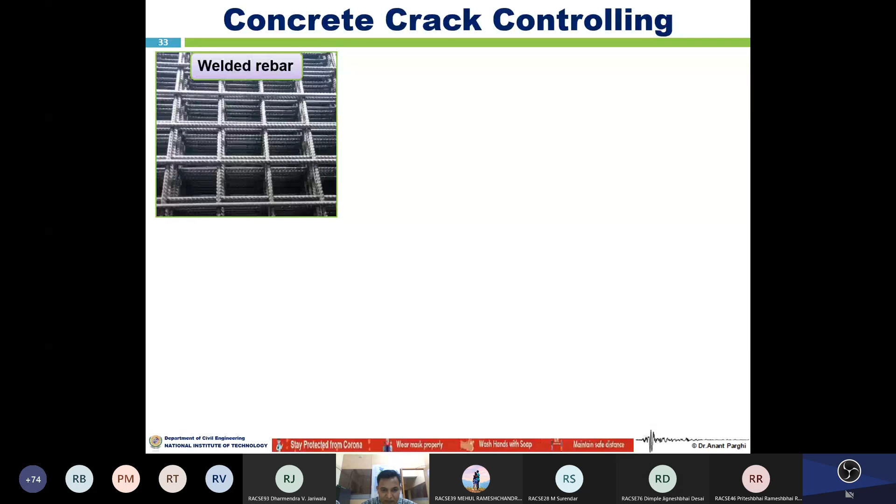So that was related to crack control for the structural design, how we can control it. But let's also see how we can control cracks in construction practice.

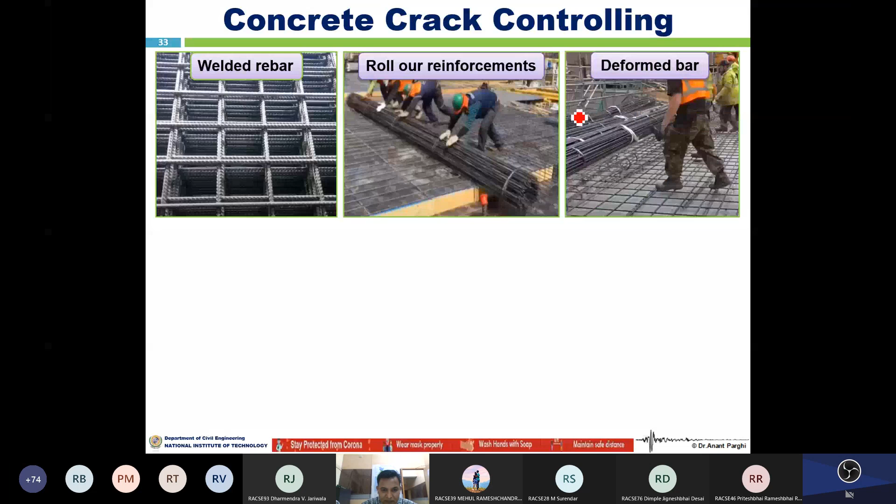Here you can see these are welded rebar, rolled out reinforcement, and deformed bar. If you are utilizing this kind of reinforcement, you can control the crack by providing closely placed reinforcement. This particular reinforcement is closely placed, but here these are the welded reinforcement also.

Here the spacing of the reinforcement is very close. This way we can control the cracks, keep them very small, and improve the durability of the concrete. You can also increase the depth of the section, increase the cover concrete, and use better quality concrete, for example high strength concrete.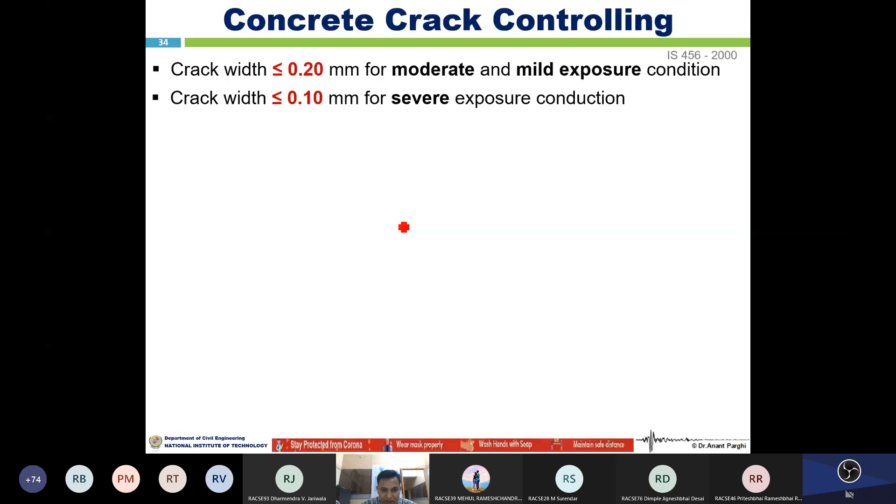So concluding on crack width, it should be less than 0.2 millimeter for moderate to mild exposure condition, and 0.1 millimeter for severe exposure condition. How can we limit the tensile stresses in the steel reinforcement? As discussed earlier, minimize the spacing with closely spaced reinforcement, and use smaller diameter reinforcement.

Here you can see the reinforcement pattern, the lateral reinforcement, where the spacing should be smaller. That way you can control the crack. You can also provide proper joints; once you provide proper joints, you can control the cracking also.

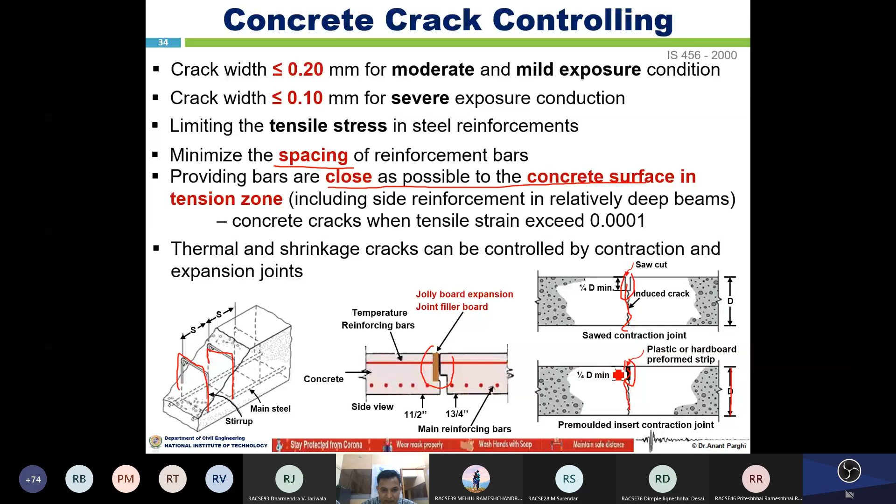Here you can see the saw cut joint. Some of the cracks are going to develop here. The minimum depth of the saw cut joint we provide should be 1/4 of the depth of the reinforcement, d multiplied by 1/4 or 0.25. We'll have to create some saw cut joints to control this.

Another type of crack in a concrete beam is due to tension. Because of corrosion, reinforcement running parallel in this direction, like longitudinal reinforcement, develops cracks due to corrosion. So how we can stop the corrosion?

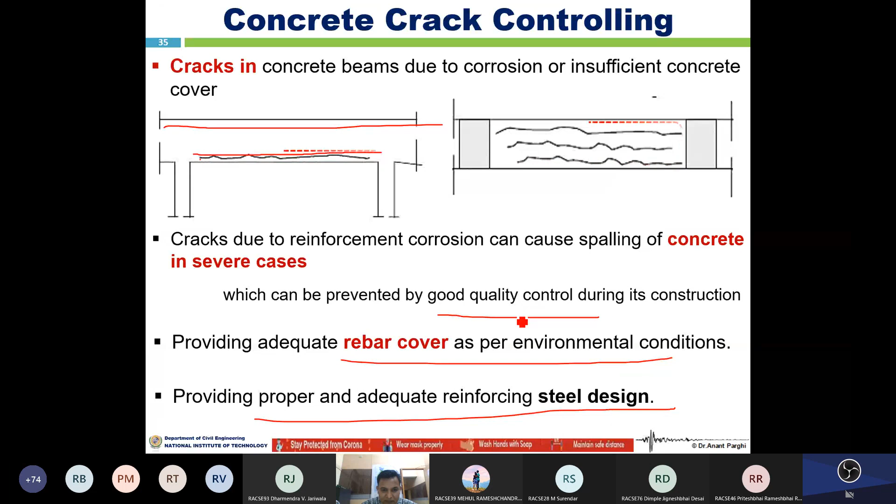Due to reinforcement corrosion, spalling of the concrete can occur in severe cases. This can be prevented by applying good quality concrete, proper reinforcement detailing, and proper curing condition. Adequate reinforcement design, proper reinforcement cover, good quality concrete, and proper curing condition - this way we can control cracks in construction practice also.

Now you can reduce the span of the structure, or provide closely placed reinforcement at the support condition, where the spacing of reinforcement will be higher because there is less shear force. Care should be taken during beam design, considering the probable load combination according to code of practice. This way we can control the crack depth.

Under-reinforced section of the beam is the main cause of cracking. So if you are designing your structure as an under-reinforced section, that is the main cause of the problem of cracks.

So cracking due to the compression failure of the beam, which appears at the top of the beam if the beam is over-reinforced. If the beam is over-reinforced, the top of the beam - the crack happens because of compression failure. In this particular stress block diagram we can understand that the structure should not be an under-reinforced section or an over-reinforced section.

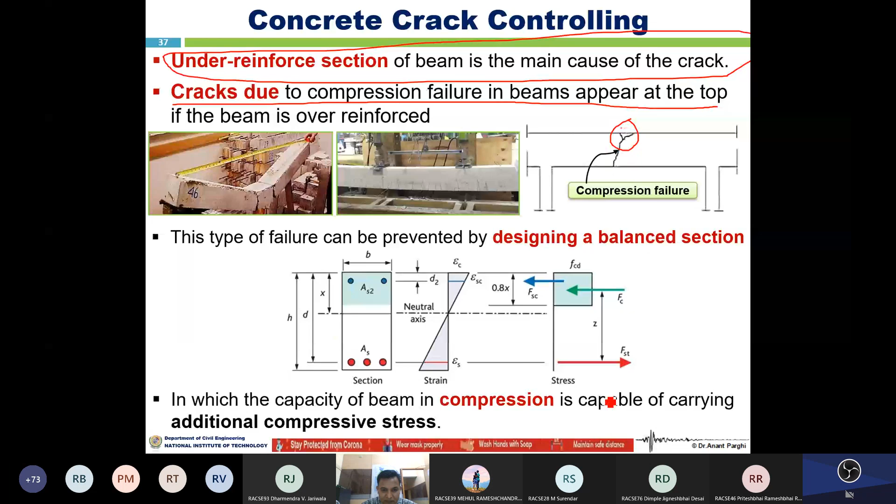So in construction practice, how we can control this by providing the proper quality of concrete, like inhibition of water evaporation - water evaporates like a shrinkage-expansive material. We can use the proper quality of water, proper durability, proper curing conditions, proper supplementary cementitious materials, environmental exposure, and structural regulation also.

This way we can stop or control the cracking - cracking resistance, evaluation methodology, like a driving force versus resistance, capillary negative pressure, temperature shrinkage, which is related to the heat of hydration.

Because if you are doing mass concreting, there is a lot of exothermic process - heat will be generated. If you are utilizing the normal process, it will not be able to get neutralized. So in those cases we should use ice during the concreting. This way we can neutralize the heat of hydration.

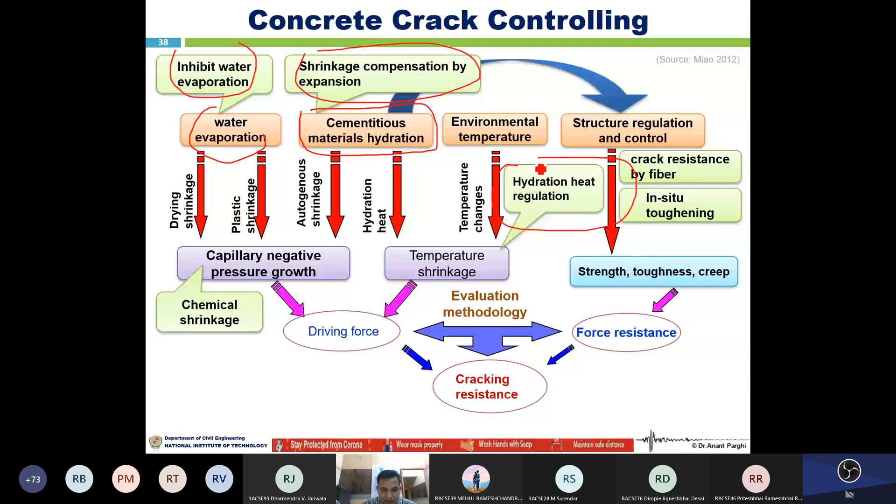Early age curing also has to be provided - in the plastic stage and the hardening stage, like a monolayer with high evaporation capacity and the hydration degree, high performance curing material with hydrophobic pressure.

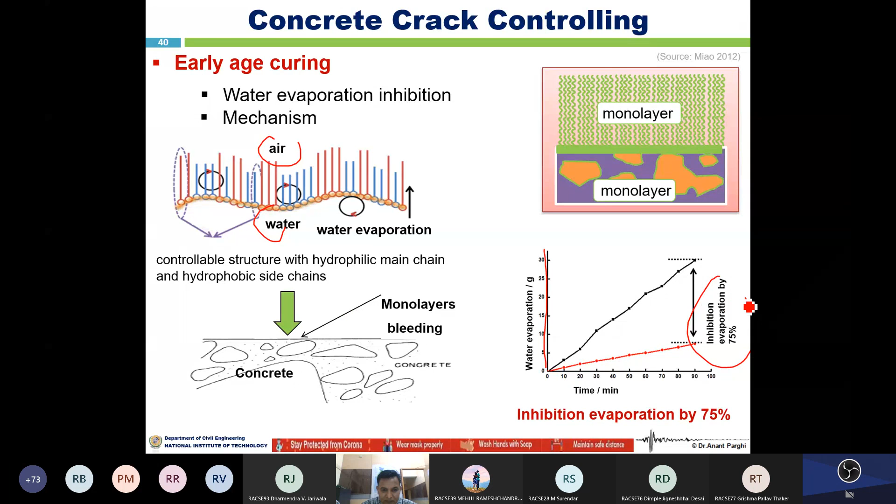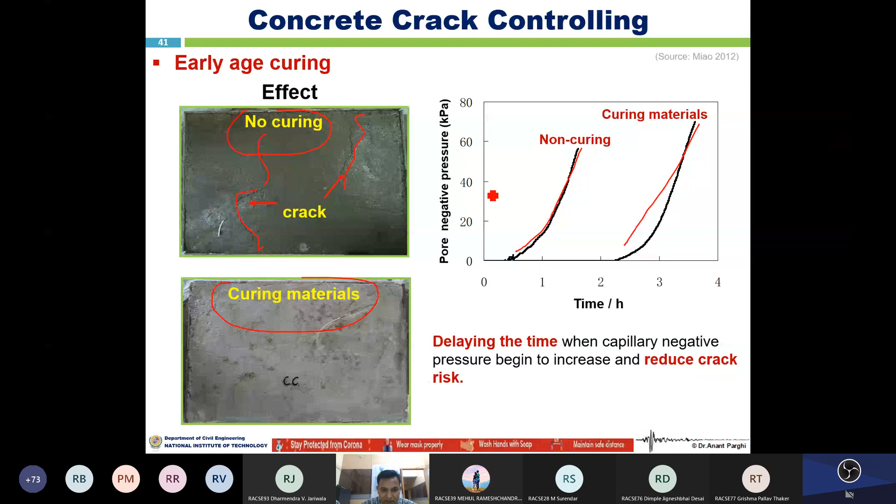Early age curing - in areas with no curing, cracks are going to develop. But if you are applying proper curing, this is the curing material versus non-curing. So here we can say the pore negative pressure will be increasing, which way you can delay the cracking.

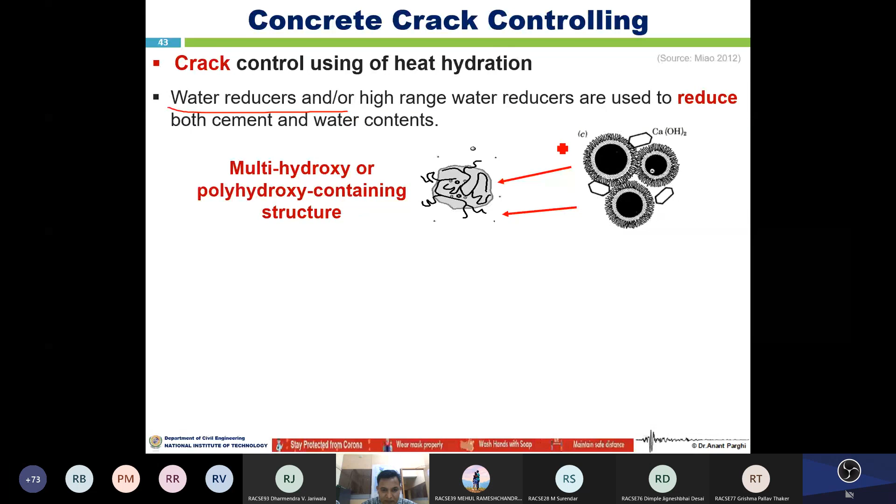Crack control using the heat of hydration - we can utilize water reducing admixture, so that way we can reduce the cracking also, like multi-hydroxy or polyhydroxy containing compounds. This way we can say calcium hydroxide controls the crack.

Like adsorbing the calcium hydroxide in the additive agent - that way we can say inhibition of calcium hydroxide crystallization, and then you can reduce the C3S phases, this compound. So during the production of cement we have to reduce this way.

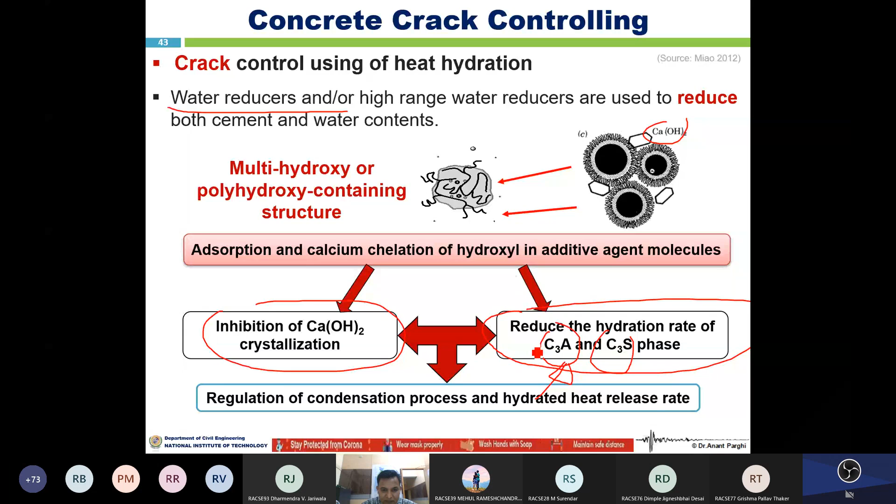That way we can reduce that particular heat of hydration - the main thing is you can control the cracking. So cracking control by providing the proper admixture also, which will reduce the heat of hydration, and eventually we can control the cracking.

So till now, what we have discussed, right? We have discussed how to control the crack, even in structural design and construction practices. We discussed the basics of crack formation in concrete structures, the crack mechanism, how the crack develops, and the different types of cracks, both before hardening and after hardening.

After that, we discussed the causes of crack formation, how the crack develops, and how we can control it using the limit state of serviceability and design assumptions. We discussed the limit state of serviceability, the permissible crack width, and the permissible deformation.